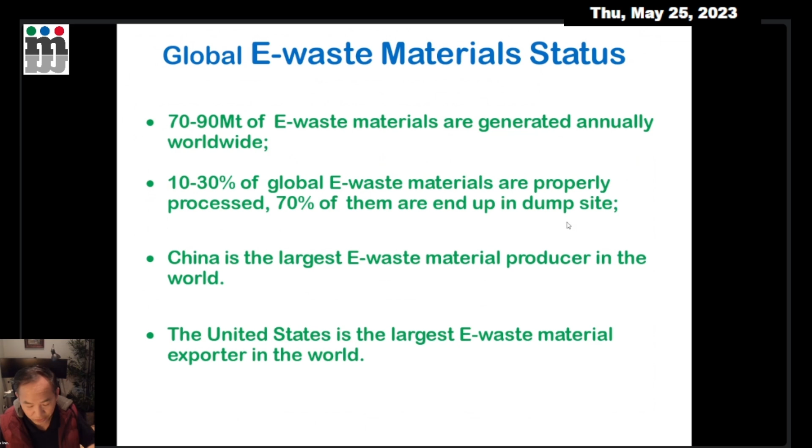And this pie chart shows the typical composition of material present in typical e-waste, not referring to solar panels or catalysts, only general e-waste like our junk computers and cell phones, for example. From this chart you can see the dominant materials are metals, mostly copper, aluminum, iron, steel. And our target material is the printed circuit board, which is the red part. It's a very small quantity in terms of percentage, 1.7. The majority are either other base metals or plastics.

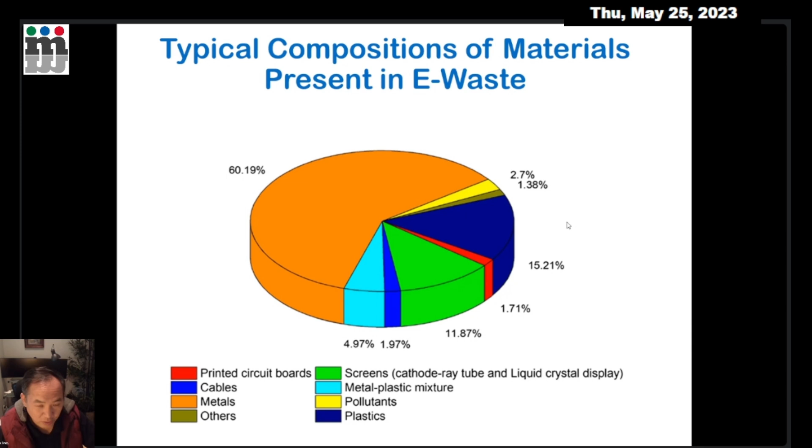As I said, solar panels have been widely used, booming, especially in the past 5 or 10 years. Everybody is pursuing green energy, sustainable energy, environmental protection. So a lot of solar panels, or what we call solar farms, are installed, especially in the US. If you go there, you will see something like an ocean. And in general, solar panels have a lifespan of around 20-25 years.

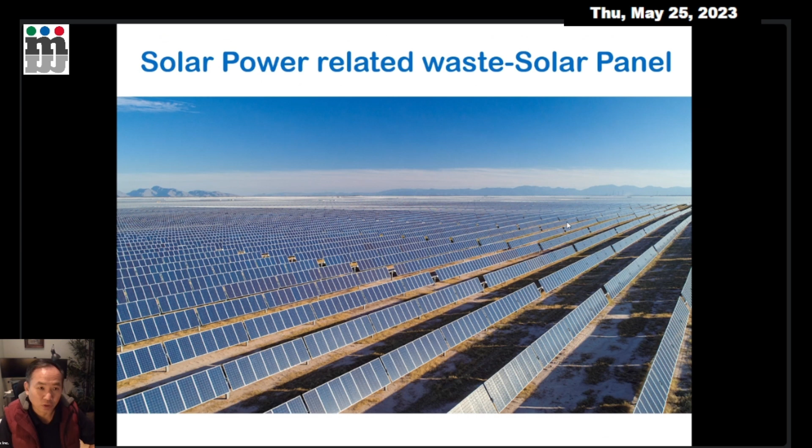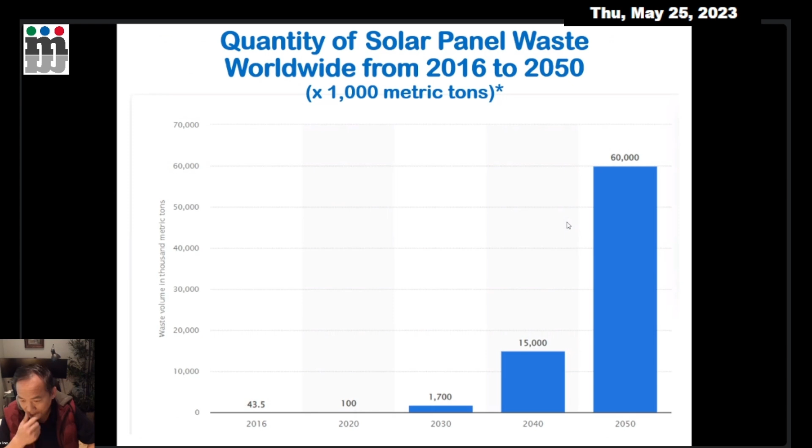Since the very first generation of solar panel installation, nowadays quite a lot of solar panels, as this chart shows, have reached the end of their life cycle. They're put in what we call a warehouse, or stockpiled. So far, there's no efficient technology for properly recycling solar panels. In the US, only 10% of them are recycled. The rest are either dumped in the dump site or kept in warehouses, waiting for proper technology to come out.

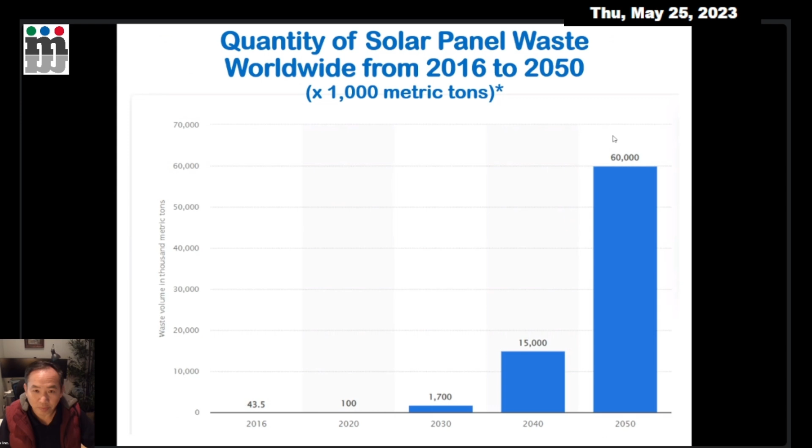So you can see from this chart, nowadays it's more than 100,000 tons. By 2030, it will reach 1.7 million tons. So it's increasing exponentially because of the worldwide concern for environmental protection.

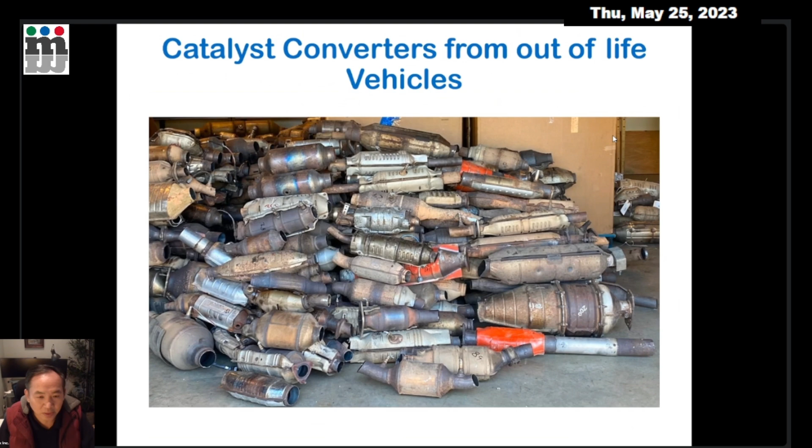And the third e-waste in my category is the catalytic converter. This has been very active in the car recycling business in past years. From time to time, we hear somebody's catalytic converter was stolen by thieves because of the value, because of the PGM. This is because each converter contains a certain amount of platinum, palladium, and rhodium.

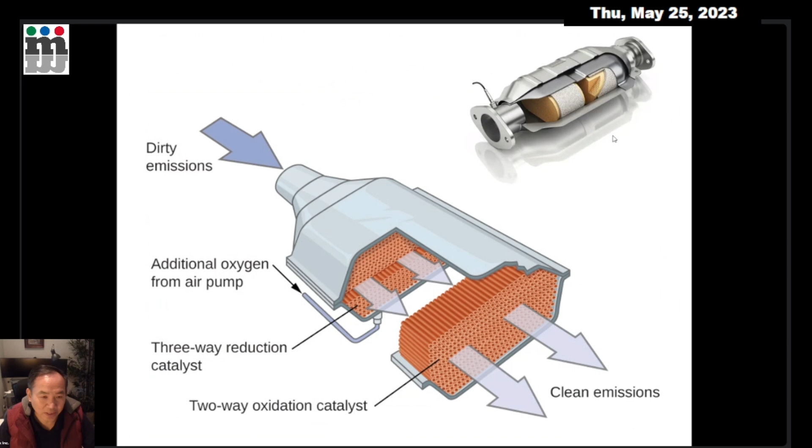And this is the function and how the catalyst is used in a car, mainly for exhaust gas emission control, dirty air in and clean air out. The PGM is used as a catalyst to convert those toxic gases into clean gas. Each year, about 30 million catalytic converters are legally recycled. The catalytic converter market value in 2018 was $42 billion, but by 2025 it will reach close to 73 billion dollars. So it's quite a big market.

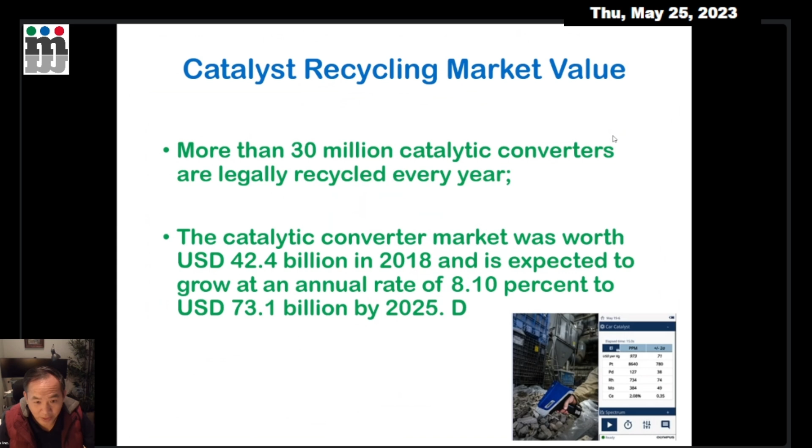This is one of the reasons why so many catalytic converters got stolen. It's very expensive, especially in past years, when the PGM commodity market was sky high.

And now I'll give a quick review of the current methods used in e-waste recycling. In general, there are two methods. One is the pyrometallurgical method, which means simply burning. The second is the hydrometallurgical method, which is the wet method. The pyrometallurgical method is only used in industrial countries, only operated by big companies like big smelters.

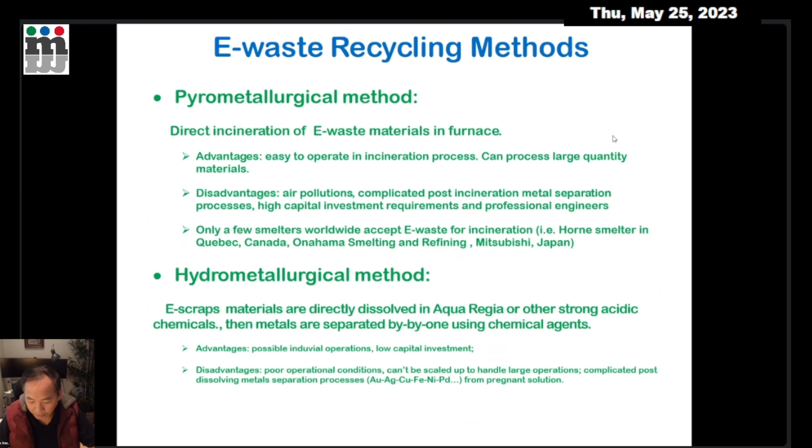So basically, this is what's going on in the e-waste recycling market. First, e-waste recycling is considered an emerging business, and there's no really matured eco-friendly method to recycle the material. Globally, only a very small part of the e-waste is recycled by large or professional recycling companies, like a large smelter center in Rouyn-Noranda, for example. Mostly it's done by individuals or small scale miners, which is bearing a lot of environmental impact. This is one of the reasons we get involved.

The most common recovered economic commodities from e-waste are gold and partially silver. This refers to general e-waste. For catalysts and solar panels - for solar panels it's mainly silver, and catalytic converters, as we already know, are mainly for PGM. As I said, the most common chemical method used is aqua regia, but it's hard to use in large scale operation because of its restrictions and operation costs.

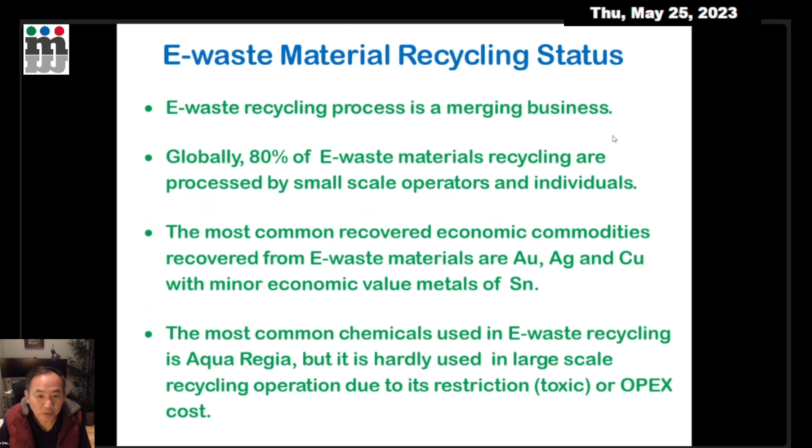Based on the current situation, we get involved. We take another approach. First, we analyze where the gold or precious metals are in e-waste. These are the 3 points we identified. First, we recognize the precious metal only exists in very small quantity, but is dominant in value in the e-waste, for example gold. The second point is the precious metals are used in electronic parts or components because of their unique physical characteristics, mainly because of their superior conductivity in both thermal and electrical conduction.

For that reason, they're only used either on the surface - for example in RAM, what we call the golden finger, or connectors or pins. In rare cases, they're used inside electronic components as wire, very fine gold wire, especially for gold, used for example in a processor and CPU, like those photos here you see.

For the silver in solar panels, silver wires are used, as I said, for its conductivity - it's a conductor to intercept the electrons in the silicon wafer to turn them into current. And for the catalytic converter, the PGM is coated actually on the surface of the ceramic honeycomb - so not inside, not everywhere, just on the surface, as the PGM acts like very fine particles as a catalyst to convert toxic gas into clean gas.

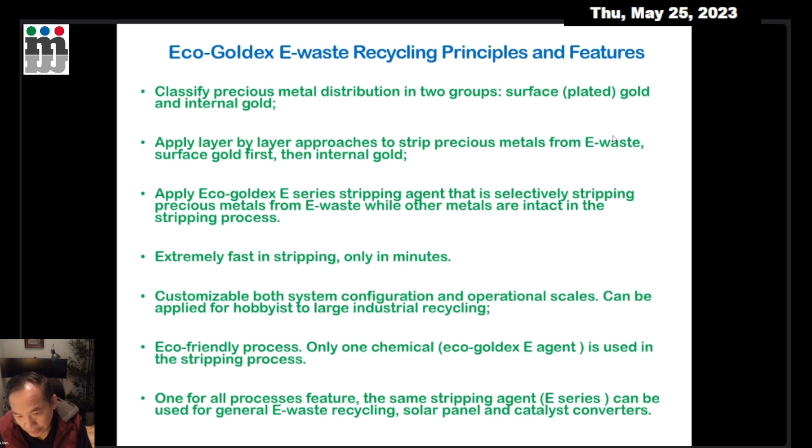Another feature - this is one of the reasons why we include solar panel and catalytic converter processing in our e-waste conception - is that our Eco-Goldex E-series agent has a very strong feature that one chemical applies to all. This means we can use the same chemical stripping solution to process e-waste, solar panel, and catalytic converter. This is what I will talk about after.

So this is a generalized complete Eco-Goldex e-waste recycling flow sheet. Looks like a lot of blocks, but if you go through them one by one, it's very simple. First, all the material will be sorted based on the quality - high quality, low quality.

Then we strip all the surface gold first. Once the surface gold is gone, all the pregnant solution is transferred to the pregnant solution storage. We apply electrowinning to directly recover the gold, or the gold and silver together if there's any silver - the precious metal will come out together and end up on the cathode. This is the surface gold.

After processing the surface gold, we process the solder tin, which acts as a glue to stick all the components onto the PCB board. This step is for the low quality PCB boards, for example like printers or old DVD players - those kinds of appliances have no gold, only copper and solder, low quality. We classify that material as low quality, and we want to recover the solder from it with our stripping solution.

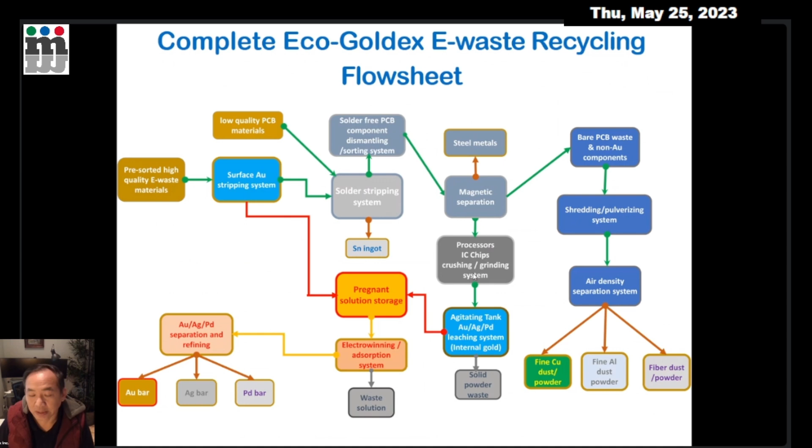Here is the simplified flow sheet covering only the surface gold stripping and recovery. As I said, the gold stripping system here - stripping, then the pregnant solution comes to the storage. We have a filter to clean the pregnant solution, then it's delivered to the automatic electrowinning machine to recover gold directly. From this step we can recover at least 80 to 85% of the gold.

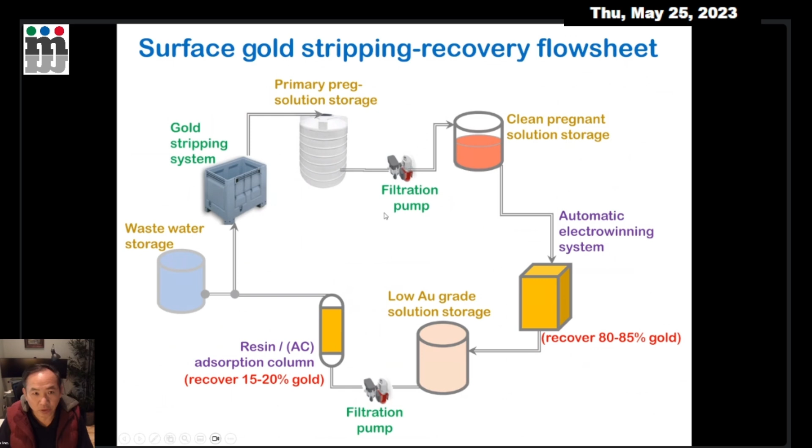The depleted solution is then sent to what we call the adsorption column. This step not only recovers the remaining 15 to 20% of gold, but also cleans the solution before we send it back to recycle. So our wastewater can be recycled through this process. This is the surface gold stripping and recovery flow sheet, and this is exactly the layout of the system.

A lot of people, our clients, refer to it as the boat. It's essentially like a boat, but with different cells or chambers for the stripping process. And it is very efficient. This little machine can process at least 1 ton per day of e-waste.

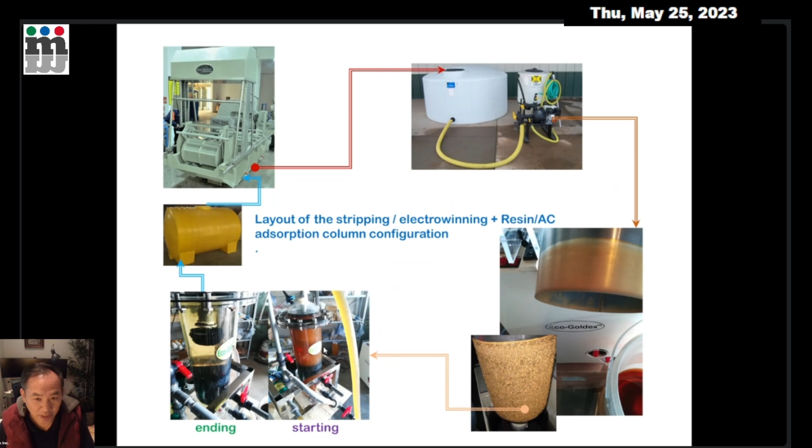The solution comes to the storage for cleaning and filtering, then we apply the electrowinning machine to recover gold directly. The depleted solution will be processed in the adsorption column for cleaning of leftover gold and cleaning of the solution, before being sent back to storage or recycled in the stripping solution.

This slide shows the internal gold stripping. As I said, the same boat can be used for solder stripping. Once the solder strip is done, most of the parts and components will be separated from the board.

Then we use a shaking table. This shaking table is not the same as the shaking table we use in mining. We screen basically to separate the different components based on their size and shape into different slots. Then the IC chips will come into different slots, which makes it easy for us to understand.

We just focus on the components, IC chips and processors. Then we have a ball mill for crushing and pulverizing, and then we have an agitating tank for leaching. Then we separate the pregnant solution using a compressing filter. Again, the pregnant solution will be sent back to the electrowinning machine for precious metal recovery.

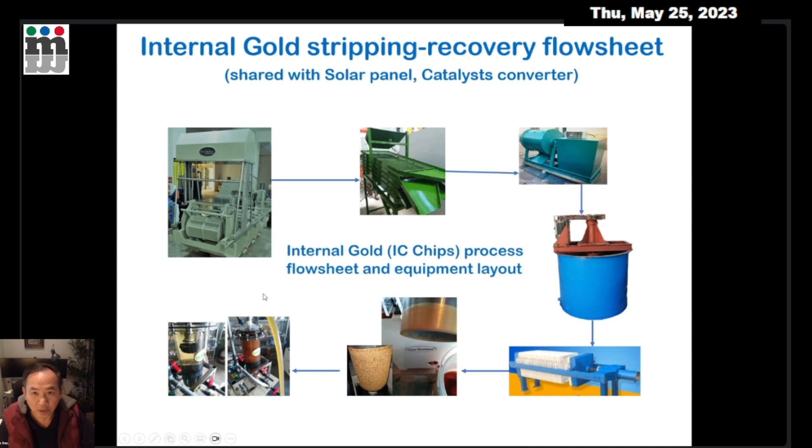We share the same electrowinning process and cleaning process. This is the internal gold recovery flow sheet. And as I said, we can provide a customized system for clients based on their requirements.

We can only do the gold, silver, PGM recovery, or we can include gold, silver, PGM and solder, or a complete system, which means we end up with zero disposal of the e-waste. Depending on the client's requirement, we provide a turnkey solution. We not only provide the agent, but also system design, manufacturing, installation, training, and on-site technical support.

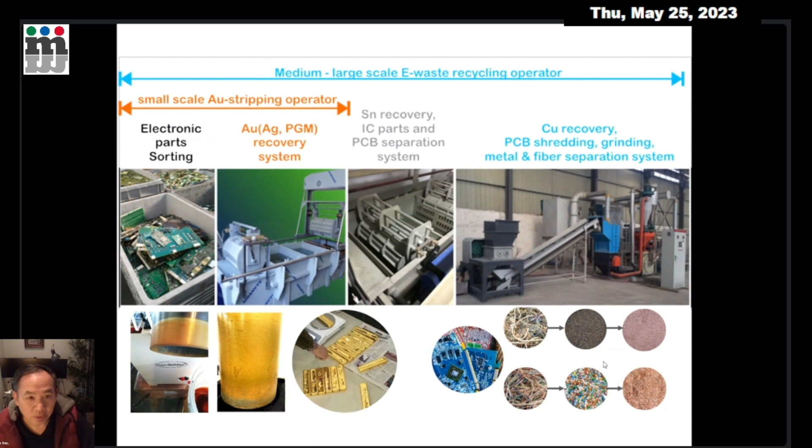So those are the slides. Now I will show some photos showing how our Eco-Goldex E-Series stripping solution works. This photo was actually shared with us from our client in Germany. He's so excited about the product.

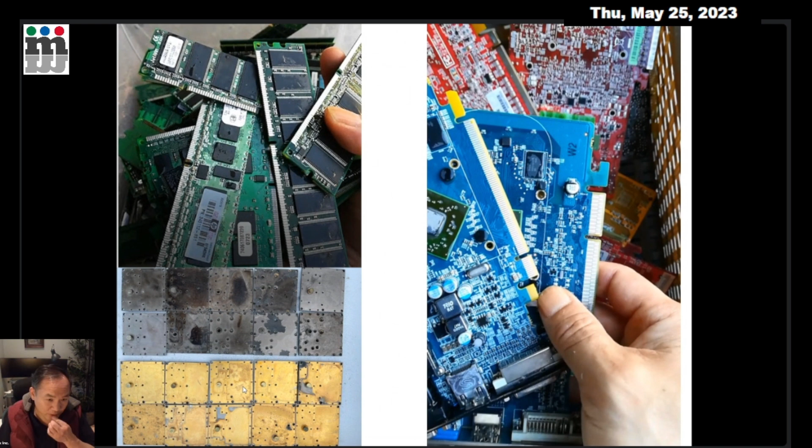And the same with the pin on the CPU. And this memory card after stripping - this can be either a memory card or a video card. On the left hand side, lower part is another block. The top is after, and the bottom is before, the gold plated. So these different materials can be processed easily and quickly without affecting what we call the base metals underneath.

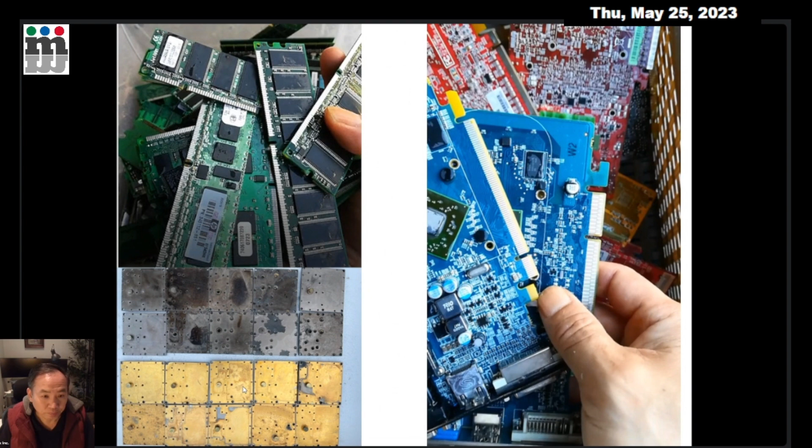Either copper or nickel. This is the example from our client. This is from Albania - we installed our system for our client. Basically what they do first is dismantle the computer, like on the top right corner.

They receive the junk laptops or servers, whatever, and people sit there to dismantle the material and parts, and sort them based on quality. This is a very essential step because different quality levels have different stripping times.

High quality takes a longer time, usually maybe 8 minutes. Low quality just 1 minute. Then the stripping solution and stripping process will be done. So this is the sorting process, and this is our stripping machine.

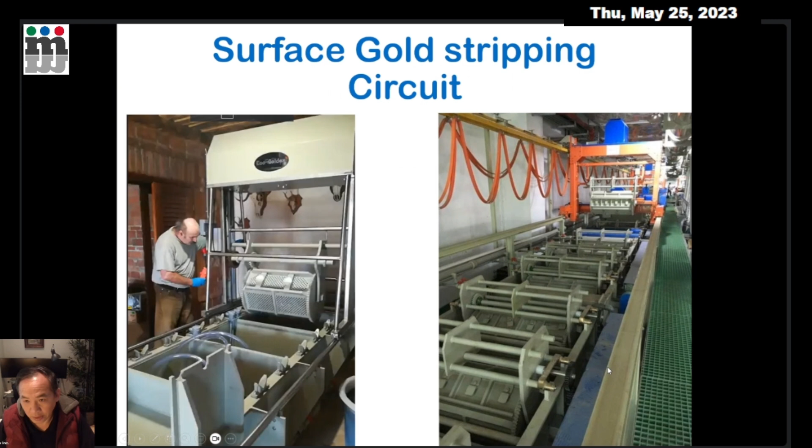As I said, this machine has 2 working cells and 1 rinse cell. This machine can process at least 1 ton per day. This system we installed in Hungary two years ago. And the right hand side is the large one - the large system can process 5 tons per day.

This photo shows how the IC chips are crushed and pulverized, essentially coming out like a powder, as we see in the mining industry. The powder is then sent to the agitating tank for leaching with the Eco-Goldex E-Series again, and then compressed to separate the pregnant solution, and do the electrowinning.

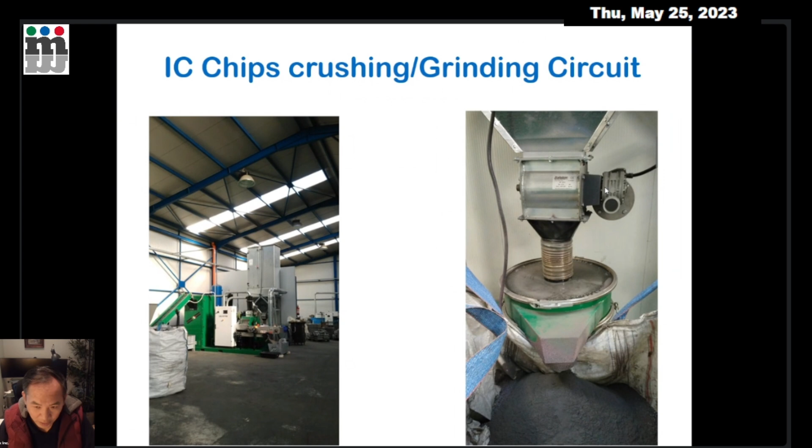And basically, as I said, we can provide a customized system for our client. For a 2 to 5 ton per day processing facility, the cost will be $75,000 to $85,000 for a complete system.

The most important thing, though, is how to get the e-waste. That's a very important part. Yeah, basically, this is what I would like to share with you guys here.